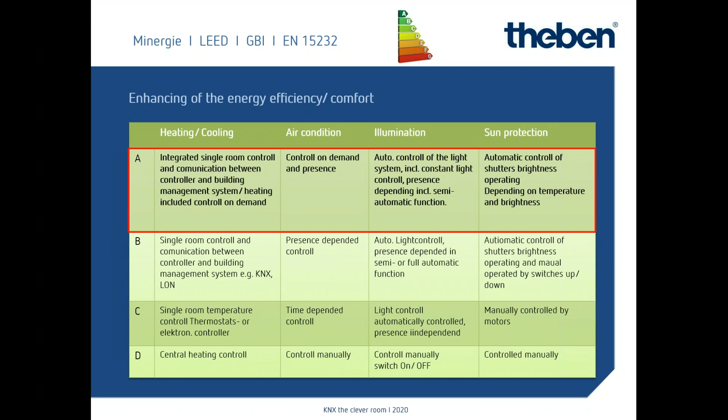And this content is nevertheless a part of GBI, a part of LEED, a part of EN 15232 and further on. The approach, when it comes to the shading control: sun tracking is the best, highest efficiency. Advantages finally: comfort, energy efficiency, and some of the shading controls, especially the actuators, are smart enough to support heating or cooling. We have here pretty few settings in our application to give you this reasonable support, this high energy efficiency. This just acts on presence, for instance.

So when the sun rises, you can see here. The sun rises early morning, so the sun is coming in quite flat. So we have here the blinds totally closed to avoid dazzling inside, for instance. Then the sun is rising more and more, comes higher in elevation, so then the slats open with the sun.

So what is the purpose of it? The purpose is that you get as soon and as much daylight inside the room as possible. Why? Because inside the room, you have to illuminate the room, isn't it? And the more daylight you get, the less artificial light you need. So the slats turn according to the sun positioning, which is called sun tracking.

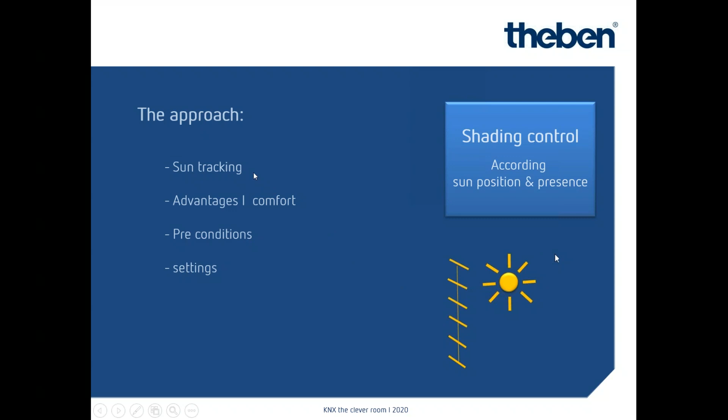So then it comes to the illumination. Illumination means constant light control. If you have ever had the chance to work under conditions of constant light control, you will love it, because it is the most comfortable illumination you can get. Early morning, midday, or in the afternoon, any time, you have the same brightness on your working spaces. And this is for your eyes, for your concentration on your work, most comfortable. And in regard to energy efficiency, the highest degree of it.

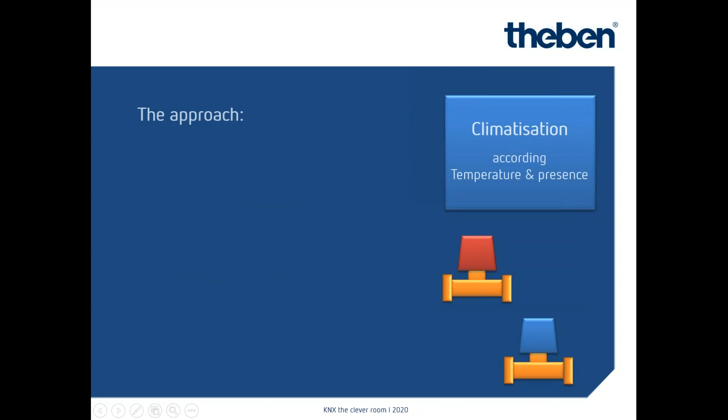Anytime you can modify the current brightness. So if you need a little bit more light, anytime you can override by manual operation, by push button or whatever.

And in terms of energy efficiency, in terms of climatization, here I'm talking today about the fan coil actuator. Because in most public buildings, school buildings, industry areas, offices, we talk in general about fan coil. That means heating and cooling. So for the different seasons, you have the right heating or cooling source in order to get the right temperature in your buildings, in your offices.

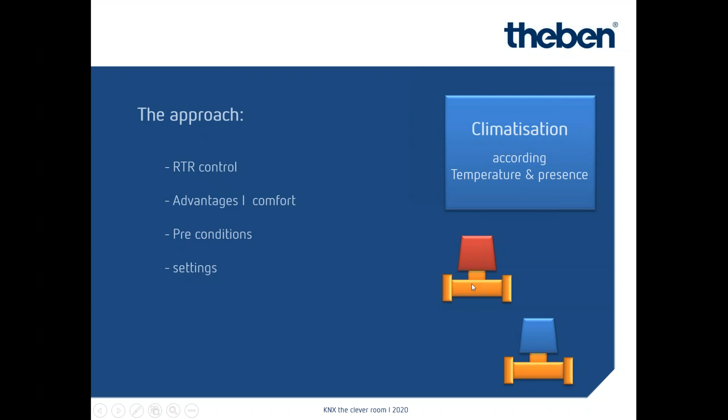For this purpose, you need an RTR, a room temperature controller. It could be, for instance, our iON, which is one of the newest products joining our product range. And what's the advantage of these fan coil actuators? The fan coil actuators give you both values, for the heating control and for the cooling control. We need just a set point, a set temperature from the room.

Air quality is important meanwhile, especially in public buildings, and not just in terms of carbon dioxide level. Like I mentioned, the better the air quality in the room, the more concentrated you are, the more comfortable you feel. Currently, dehumidifying plays a big role as well for well-being. So the degree of CO2 and the degree of humidity inside the room is essential for your feeling, for your well-being. And this you can control with a fan coil actuator.

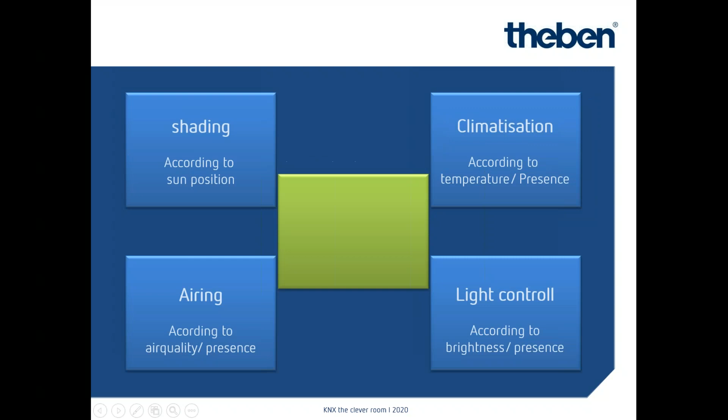And what if you put all this together in one room? That means you integrate, you collaborate all these functions, and the result could end up in the smart room or the clever room. So a little bit more detailed now. We just concentrate a little bit on the part of the heating. We need a room temperature control, sure. In our case, we take the iON, the room controller, then a heating actuator or a fan coil actuator in order to drive a valve. So this is standard.

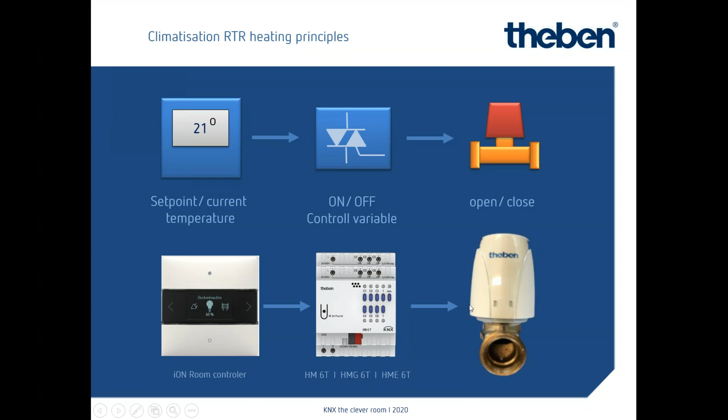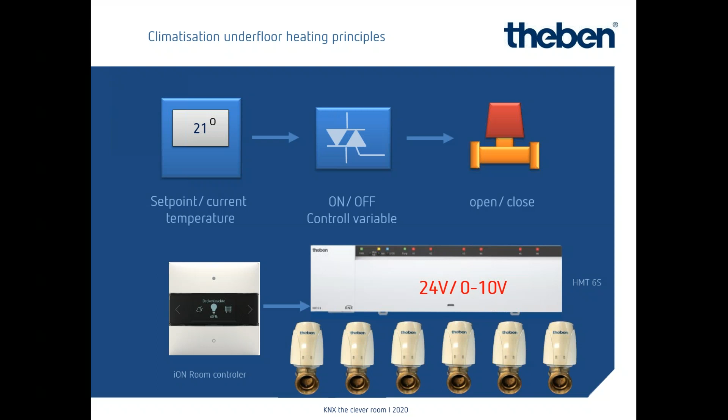But for this purpose, you have to use heating, or have to support heating and a separate cooling actuator to open the separate, let's say, valve. Due to that, we recommend to use the fan coil actuator. So this is just another example, the heating actuator for the floor heating, but you need a separate one. And if you want to do all in one, then please take the fan coil actuator.

And the fan coil actuator is able to give you three options to moderate the heating, and as well to do the airing control in 3 steps, or stepless, 0 to 10 volt output commands. For instance, to control dampers in big airing systems or climatization systems. So this could be quite interesting, especially the stepless 0 to 10 volt control.

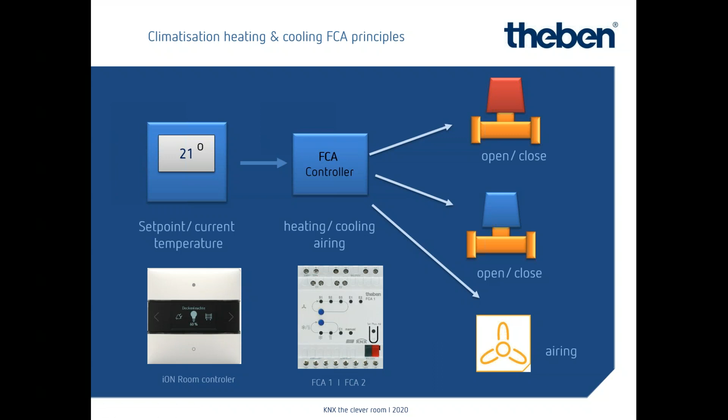So this means assisted by a clever shading control, which requires for the sun tracking the weather station, which in our case is Meteodata 140S, smart enough to know when the sun sets, when the sun rises, due to the local geo positions. And then you can address from the weather station which facade of the building shall start with the shading, which position we should have on the easterly side, which position of the shades we should have later on the southerly side and further on.

And the weather station is smart enough to give you the reasonable values of the repositioning when the elevation of the sun changes during the day. The higher the sun comes, the more open the slats get. In our example today, we are using the JU1, the small, tiny little shutters blinds actuator for this demonstration.

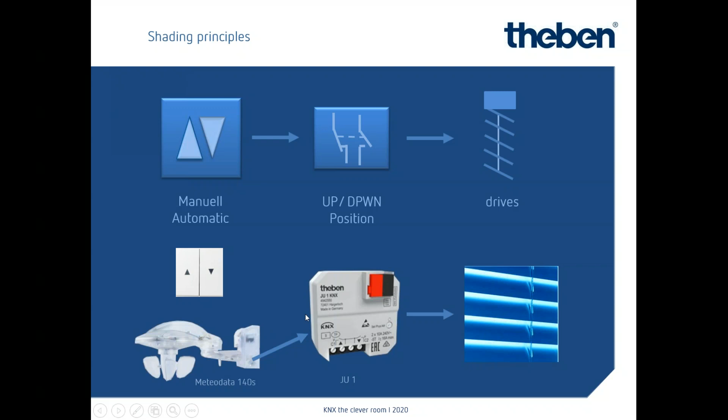And as well, we need the daylight control. So in the daylight control, which products are essentially required? You need a powerful presence sensor. And what is the precondition for the presence sensor? The presence sensor has to have a permanent light metering. So every second, the brightness sensor inside of the presence sensor should update itself.

How is the condition here on the table, for instance? If we have some clouds, the condition here on the table changes, and the sensor on the ceiling has to recognize it and send the dimming control commands accordingly, to dim a bit up, to dim a bit down. So this is an automatism you have to care about. If you do the setup once, you need exactly 4 group addresses, and then the system runs.

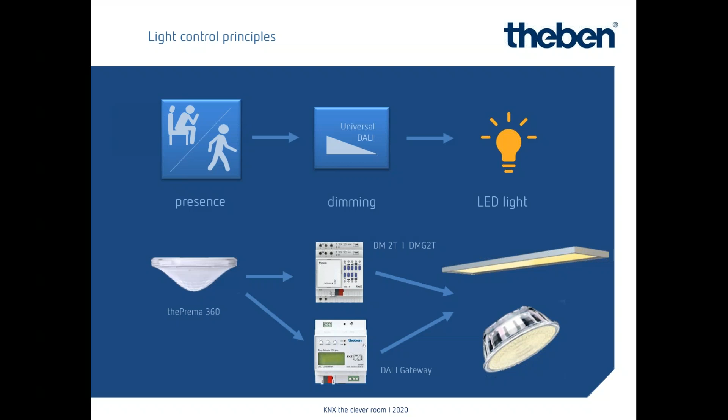Nevertheless, if we talk about the universal dimmer, as an example the DM2T, or if you do this light control with a DALI gateway, you have implemented, in this case, for instance, 64 lights. You do some groupings of different lights for several areas, and then you can do the constant light control accordingly. Fully automated, so that means you don't have to do anything.

But as well, you can anytime press a push button and override if more light is required, or probably for school purposes, the teacher or the professor wants to show some video, and so you have to reduce the indoor light. So at any time, you have the chance to reduce or to manipulate it however you like or need it.

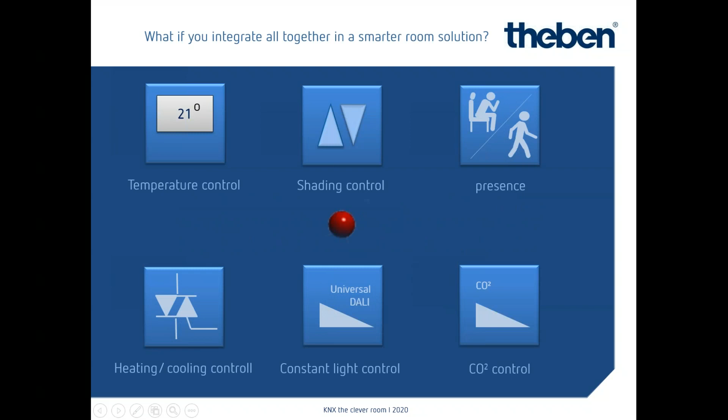So what if you merge all these together? This makes the smart and the clever room. And this sounds really complicated. First of all, it's really sophisticated to do the temperature control, the shading control, the presence, and so on. But what you get, what is the reason why we put all these together? Let's share some ideas with you.

So if we want to have heating support due to shading control, according to the brightness threshold, the blinds remain open. Why this? Let's do an example. The indoor temperature early morning is probably 18 degrees, so not that much.

So nobody is in the room, but the sun was rising, and we have now a pretty warm and pretty good summer day. And the threshold is met, the condition is met. So then in general, the blinds run down and close to give you reasonable, let's say, sun protection. This is standard.

So, but what is the intention? What is the idea of this solution? Nobody is present in the room. The indoor temperature is below the set temperature. Outdoors, we have nice sunshine, a nice day. So what happens? The sun will give you energy, warmth energy for free through the windows. It supports us to heat up the room, doesn't it?

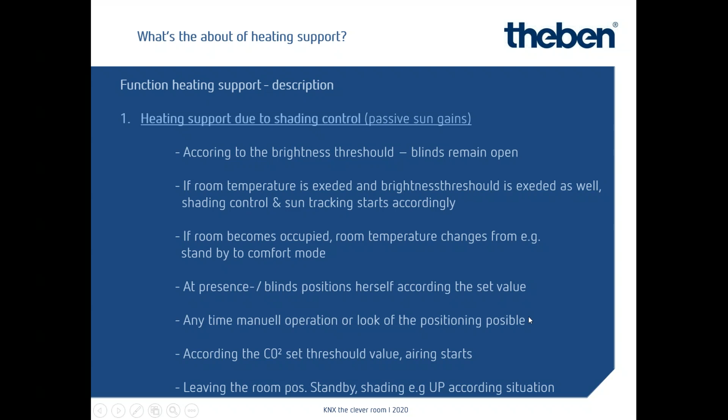And what if we talk about the cooling support? We have a lot of sun, we have warm days like we had here in the last couple of days in Germany, 35, 36 plus. Amazingly warm. So what we need here is cooling support. Basically, such rooms are climatized rooms, supported by a huge cooling system, for instance.

So what if early morning the sun is shining brightly? The blinds automatically run down. The start of this procedure could be given either by a bit command, by a push button, so you can start it manually, or you have time management in the background, which gives the on command, so operate now, enable now this sun shading control.

So early morning, the sun is shining brightly. Nobody's in the room, but the blinds run down immediately. Fully closed, which means full protection from the infrared light of the sun. If somebody pops in for the lesson, for a meeting, whatever, then just the slats open to the position calculated from the weather station, according to the elevation of the sun. So you now get a maximum of natural daylight inside the room.

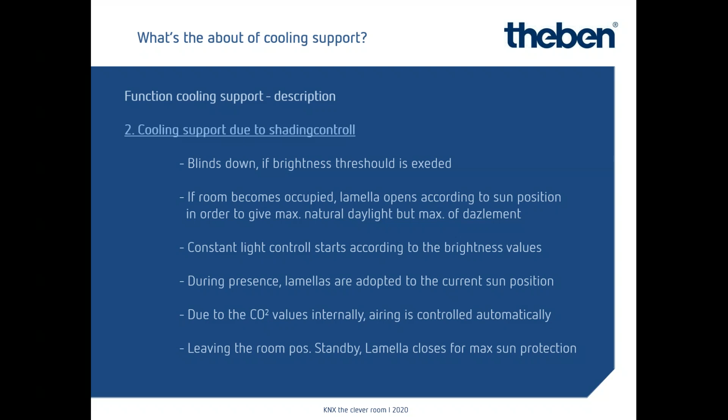And when people or students are finally leaving the room, the presence sensor discovers, okay, nobody is there anymore, the lamellas close 100% and give you shading protection again. So the cooling system gets support from the blinds automatically. You don't have to do anything. This is an automatism which runs on its own. I think it's really impressive and pretty simple.

And again, you probably expect that it's rather complicated to do the setup, the allocations, the group addressing, and so on. I will allow you a glance behind the curtain. So you see here, this is an RTR, room temperature controller, could be Varia, could be our iON. You just need to give the heating value to the heating valve or to the FCA. However, you need this as well for the cooling support. So this is just one group address from object 13 to object 0 of the FCA2, and object 16 of the Varia to the cooling object of the FCA2.

Then you need, for instance, the activating value, which you have to send to the shading control, because in our smart blinds actuator we have a communication object which requires the situation in the room. According to this situation, the smart blinds actuator determines if it has to support us with cooling, which means down and closed, or if the room condition is not met, it releases the shading to the upper position in order to support us with maximal daylight and with the sun, which helps heat up the room accordingly.

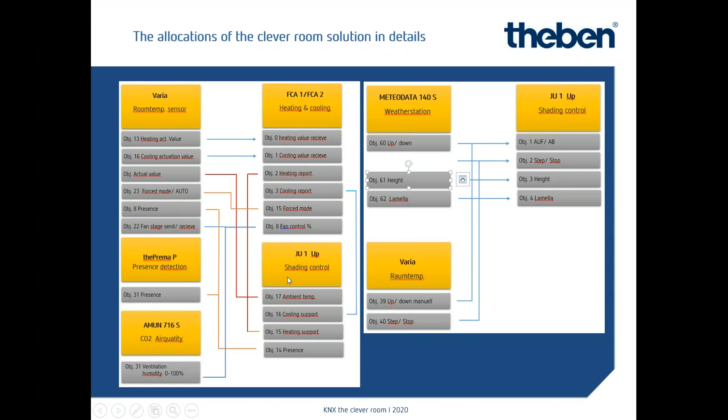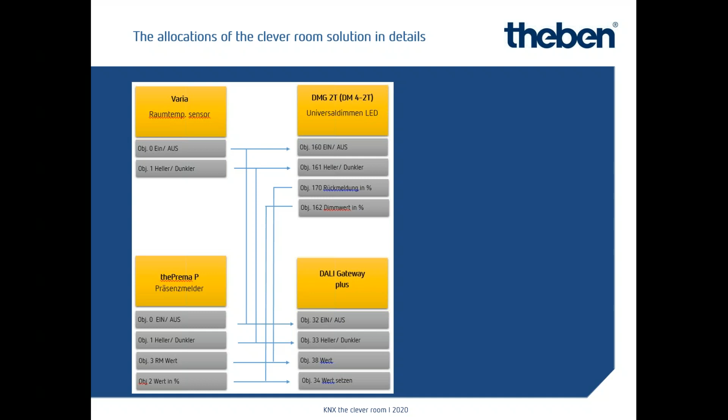So I am currently at, let's assume, 62%, and the system compares it finally to the reasonable situation on the table and decides, okay, it has to send a value again because the condition is not met, so please rise further on. And when the condition is met, the system sends a stop telegram, and the constant light control stops immediately. If it's the other way around, it becomes darker - because it's a cloudy day, thunder is upcoming - then the presence sensor starts again to send on communication object 3 a value telling the dimmer: please rise your dimming value a little bit because I have to bring this all again into harmony, because some artificial light is required.

So pretty simple, and only a few group addresses are required for such a sophisticated solution - in terms of energy efficiency, the highest degree in a room.

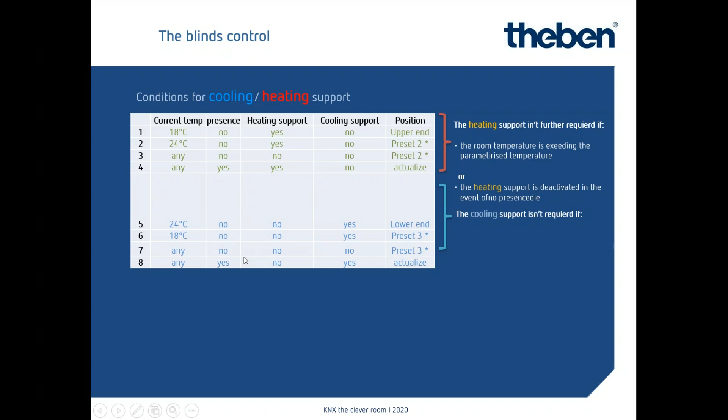If it comes to cooling, 24 degrees is the internal temperature, nobody there, heating support is not required, but cooling support, yes. So then drive down, lower end, close the blinds totally. Depending on that, you have a fully automated system.

The effect, to make it a little bit more precise - this is sun tracking. Here is an example of a single family home. We have here a 4-channel switching actuator. The sun is rising on that side, so this sophisticated solution, this sun tracking, starts on the easterly side.

The flaps, the slats, are adjusting accordingly. Then the sun is moving around the building - this is the azimuth - so it runs around or moves around the building. Then channel 2 starts here to give you the reasonable shading when the sun comes at late noontime. So it starts here, and finally it ends up with channel 4 on the westerly side, where the sun finally sets.

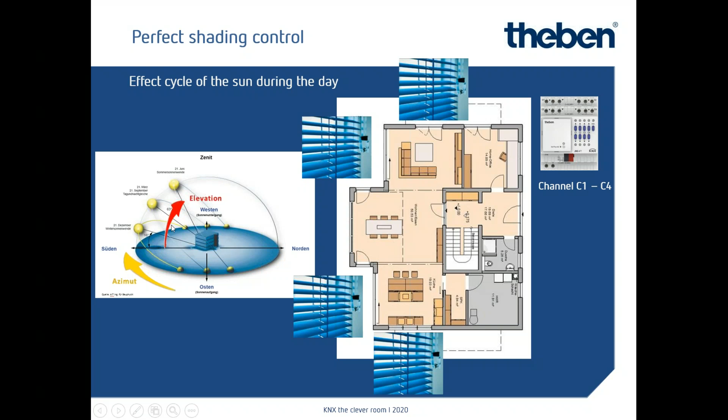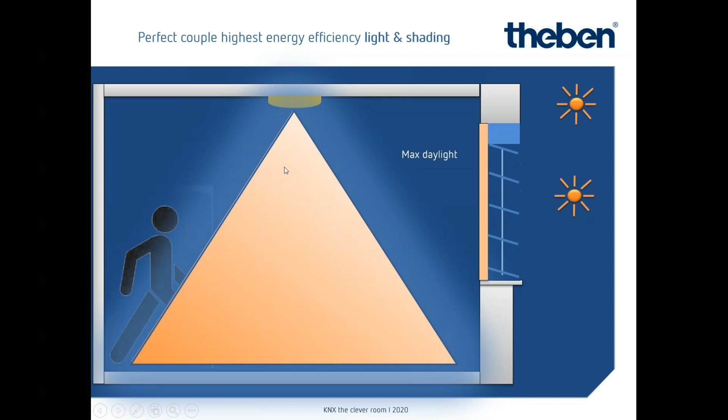Depending on this elevation, on the positioning during the year, the slats are opening and following exactly this move of the sun day by day. That's the approach: you come in, the artificial light turns on, and as the sun rises a little bit, the slats move accordingly, so you have the maximum of natural daylight, and you can start to dim down this automatism.

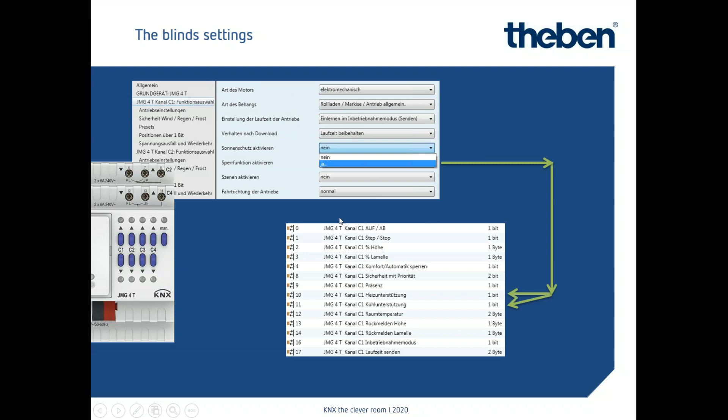And this is, I think, quite interesting. So in regards of the application settings, let's take, for instance, the application settings of a shutters and blinds actuator. We need, for instance, the kind of motor, for instance an electromechanical motor, and this has to be linked finally to heating and cooling support.

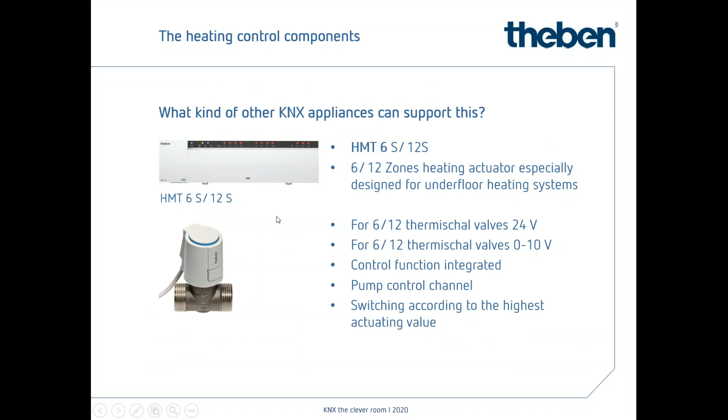Similar settings exist for maximum energy efficiency. You can use, for instance, the highest actuating value. This could come, for instance, from floor heating, or it could come from ventilation.

And if you have a smart heating solution which is, for instance, communicating on an OpenTherm base, then you can act on the heating curve. If there is a big demand, automatically you can raise the heating curve. If there is no demand for heating, you can lower the heating curve automatically. This you can execute finally by the OpenTherm gateway, the heating gateway from our product.

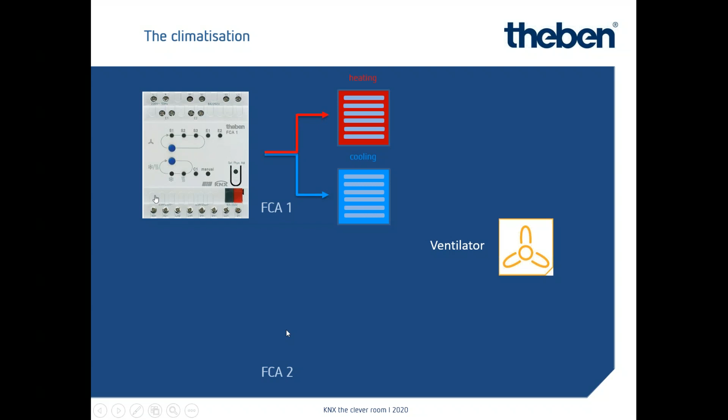I have not considered this in this presentation, but this could be an additional plus, for instance, to achieve the highest degree of energy efficiency. FCA1: heating cooling support plus ventilation, step 1, step 2, and 3.

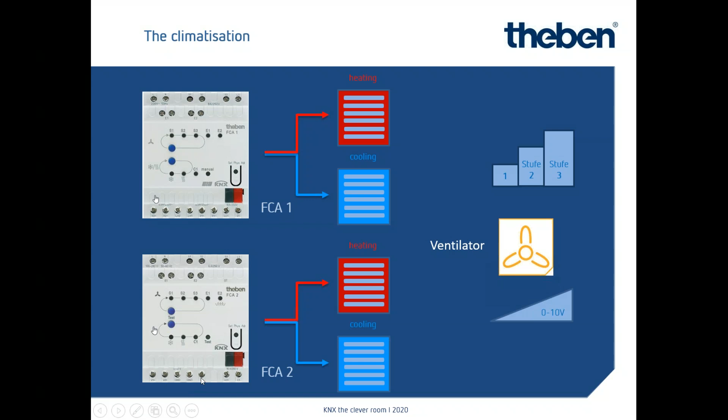And here we have the FCA2, looks totally similar, same housing, the difference is in the printing, FCA1, FCA2. The most important thing is finally the output, which gives you a 0 to 10 volt control command in order to provide stepless control.

Short step into the CO2 control. I think this is something we should consider more and more, for instance in school rooms. We have to bring in a good value and amount of fresh air, because 30 children during the day need about roughly 750 cubic meters of fresh air during the entire day, depending on the size of the room and so on. These values I got from the Association of HVAC manufacturers.

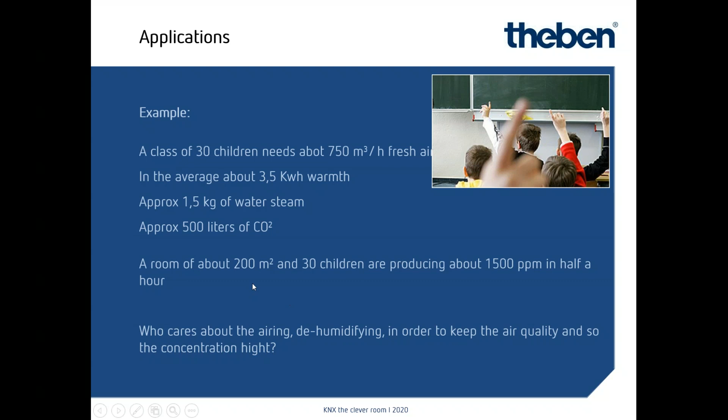The average heat that people give into the room from their body is approximately 3.5 kilowatts. Depending on humidity outside as well, approximately 1.5 kilos of steam humidity, and approximately 500 liters exhausted, 5 liters of CO2. So that means there is a big impact from a certain amount of people in a room, which finally requires a reasonable, good ventilation.

There are different approaches. When it comes to ventilation in general, you can do it according to, let's say, a time control, a time management system—every hour for 10 minutes, for instance, the ventilation runs. Okay, fine, everything is well, but what if nobody is there? Is there any need? The ventilation costs electrical energy.

And consider, for instance, when we have autumn or winter time, we have cold air outside. We need heat to heat up our rooms, our environment inside. That means warm air is exchanged, blown out to the ambience, and the fresh air which we bring in has to be heated up again.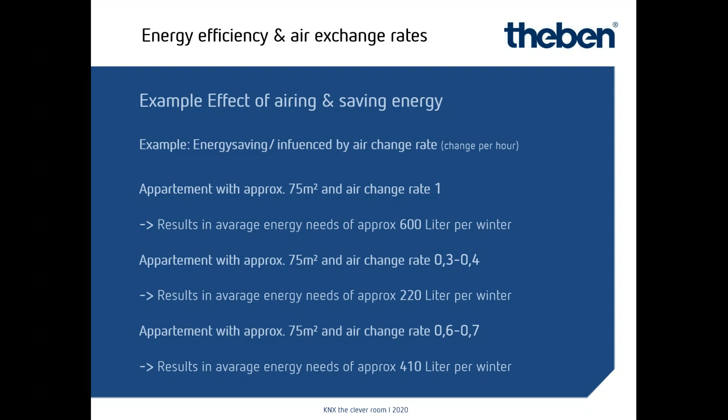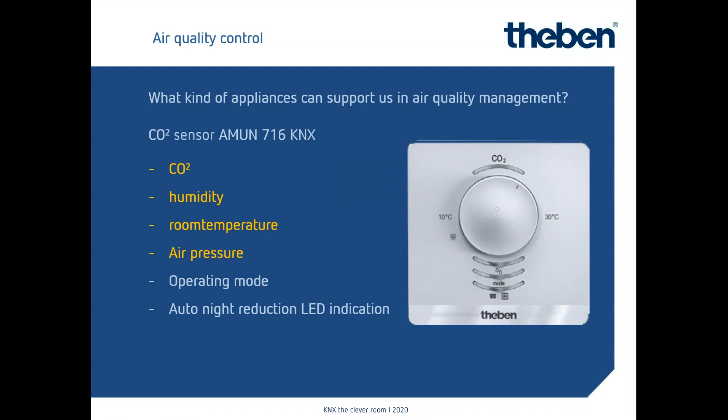Due to this presence-dependent CO2 values, or presence sensor, like the Amun here for instance, this acts as a kind of independent referee. The sensor discovers the air quality—nobody there, so the air quality has no reasonable changes, why should it? If people are coming in, a class or lesson starts, or at university the professor holds his lesson, a bunch of students come in, and automatically the CO2 value rises. The sensor discovers this and drives accordingly the air ventilation or dehumidifying. This is an automatism running on its own—there is nothing to do.

But I think one thing you need to know to get a little feeling about that: breathing in a good environmental circumstance, for instance when you go hiking or are just out in the environment, in general we have good air, and the air quality is approximately, depending on where we are, 400 to 600 ppm, parts per million. But due to natural human breathing, the exhale, depending on physical strain, can be up to 40,000 ppm.

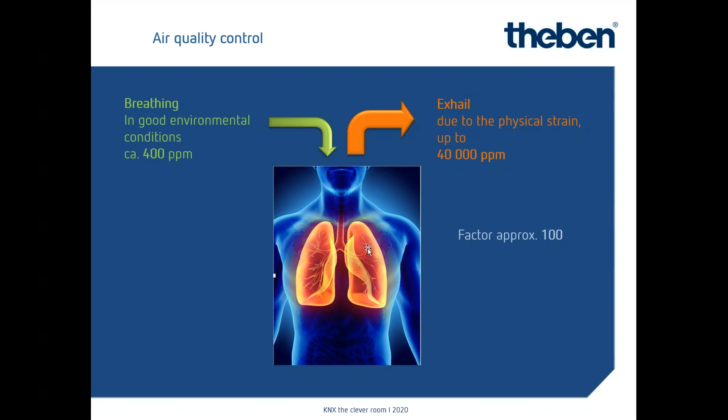Okay, any questions? So that means we have here a certain factor which has a certain impact on the air quality inside of the room. We are talking about CO2.

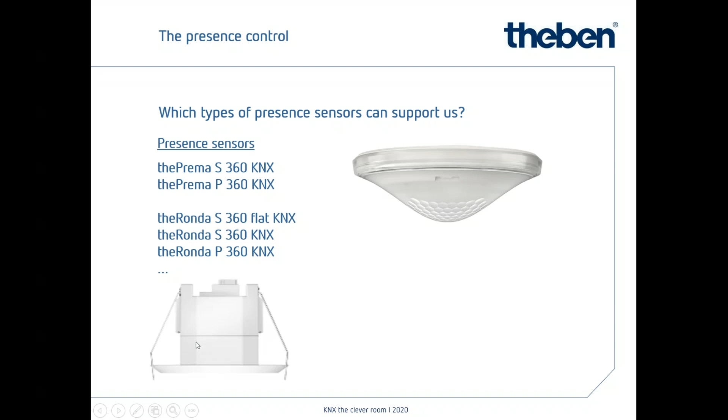So for a reasonable, good light control, we need the presence sensor. So thePrema, for instance, the Prema P is this one here, or the theRonda S flat, KNX based in this case. Ideally equipped with permanent light metering. The lux levels could be adjusted externally.

And finally, we have here short-term presence detection. So just as an example, when somebody is entering as a teacher, just entering in this classroom, nobody there, okay, go, done. Our sensors are smart enough to realize there was just a person there, just watching in.

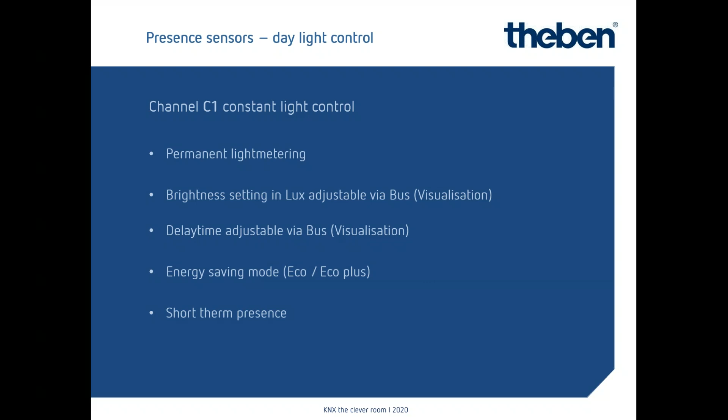So we take this time frame, and if the time frame is below 20 seconds, the set delay time, which is in general in the classroom 10 to 15 minutes, is automatically readjusted down to 2 minutes. Latest after 2 minutes, the automatic light control is switched off.

And this could be of interest as well, depending on if you equip a schoolroom or an industrial area, you can adjust the speed setting. That means the constant light control, how fast or how slow it should act.

I recommend keeping this in a middle or low speed quality, because if you are a little bit sensitive, probably affected by migraine, a fast constant light control is not recommended. So keep it in medium or slow speed.

But what is most important, if you have chosen these school settings, anytime you override, you can momentarily put the light to your desired value. For instance, the teacher wants to show a video, and artificial light is a little bit too bright. However, anytime you can override temporarily, this is one option.

And if you put these settings in our presence sensor into office position, so if you modify brighter or darker, this new value becomes the set value on which the constant light control is controlling. So if you want more light, you dim reasonably a little bit more up, and then it's the new threshold, and the constant light control works to achieve this new set threshold.

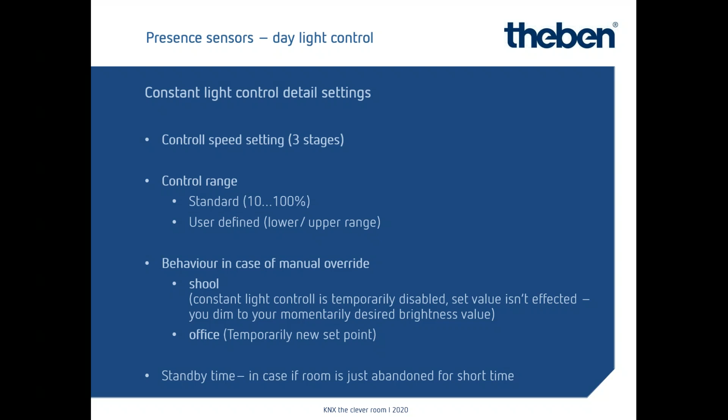When all the parties have left the room and the delay time has elapsed, in both cases, school or offices, it goes back to normal. That means the set values in the ETS settings are taken again when the next person enters, or when the next lesson starts.

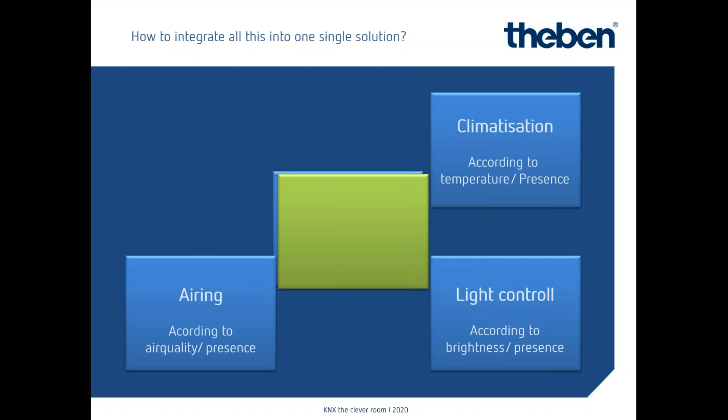So that means presence dependent control, smart and clever, energy efficiency, automatic and full automatic heating and cooling support, sun tracking at its best, maximum CO2 air quality, energy optimized, and fast and easy to configure. So that's the theory. We put all these ideas together in one room and one solution to finally get what we call the clever room.

We need, for instance, to set this, and I'll do it online now, I just have to do a cross check if I'm linked with the IP router. Give me just a second to be on the safe side. I have to link to... came back to this, company settings. Sorry for keeping you waiting for a second, but I have to change now the link to the Wi-Fi network to the router, which is built in here in my demo case. This takes a second, it's not me, it's just the system. Okay, here we are.

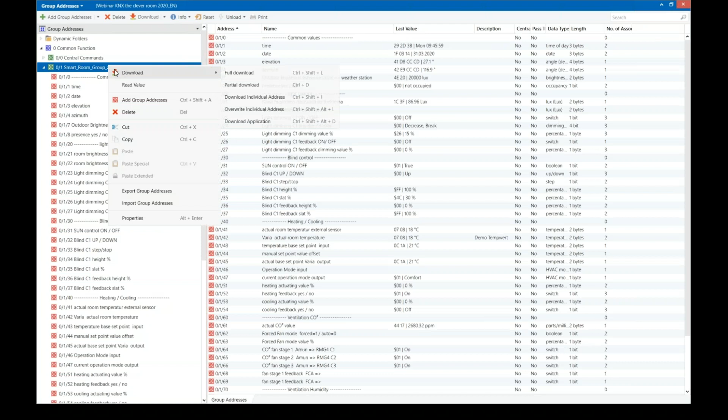So that's it. So coming back, move up here. Okay, it's a little bit slow here. So here we are. So we have here now time. Let's start a short example. So I write a value. Assuming, for instance, we start at 7 o'clock and 10 minutes. Okay, and write this. What's ongoing here? Again, write the value.

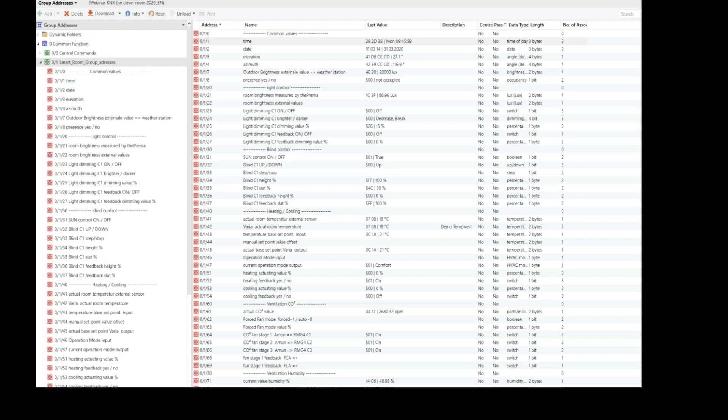I see. I will probably do the commissioning. Give me just a second. It switches always back to the page which I don't want to have. And I discover now a pretty slow communication in my system. Currently I have just a white sheet of paper. So I try to switch to the other page. Currently the ETS gets stuck. I just get a white sheet of paper now.

Bitte? Yeah, yeah, but I cannot see. There is something in the background now. I'm really sorry for that. What happens now? No. White screen, don't know why. Yeah, habe ich, komme dran.

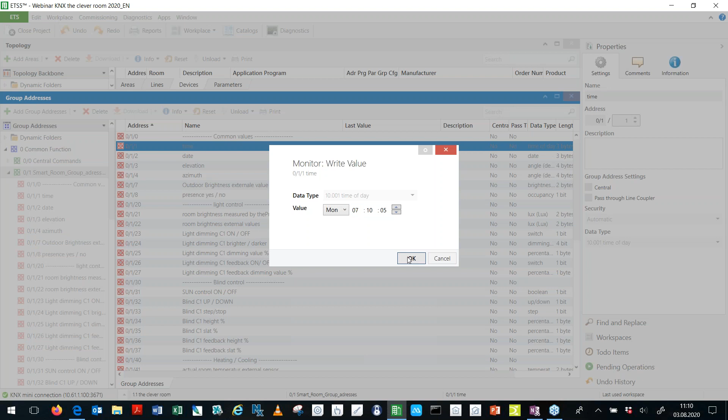So then I open the workspace and the group addresses, full screen. We have now again our pages which we need. So let's see, smart room. Hopefully I can have this now. 3, 2, 1. Okay, again try to write the value. So I'm now at 07. Send date and write value. Assuming, for instance, we are talking about March. It's okay.

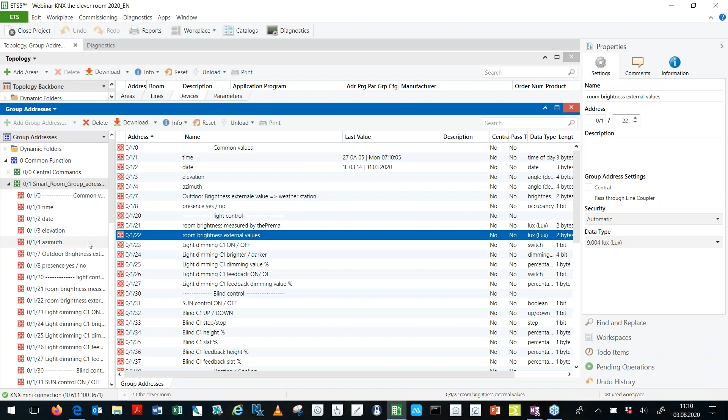So then we need to send the base setpoint temperature. External brightness: we need the room brightness external value, the outer brightness, this one here. And assuming we have, for instance, 20,000 lux, nothing happened again. So you see here on the presentation, Christoph, you can start the camera link. Presence currently is not existing.

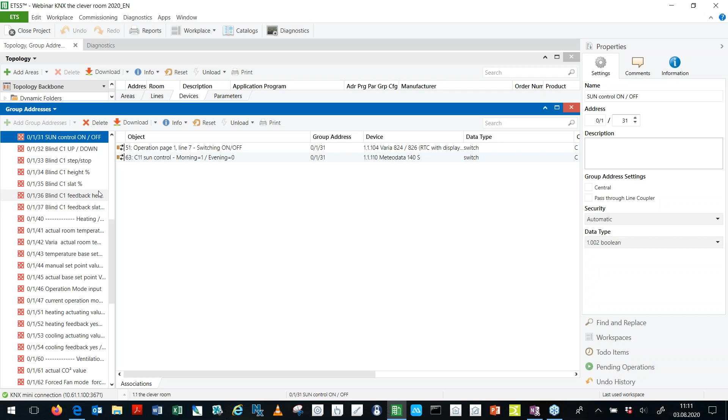We need the sun control to activate. Sun control activating here. I write the value, for instance, true. So this is fine so far. And we need the actual room temperature, and this we need to write as well. So the current room temperature is, for instance, 18 degrees.

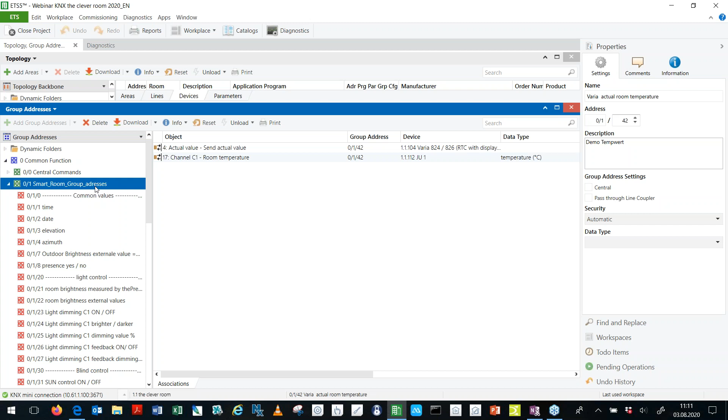And send. So what happens currently? Nothing, because it is early morning. We have 20,000 lux. To get a better overview: we see here it is 7:10, the 1st of March. 20,000 lux is external brightness, sun control is activated, and the current room temperature is 18 degrees. So nothing happens. That means the blinds remain open, as you can see here.

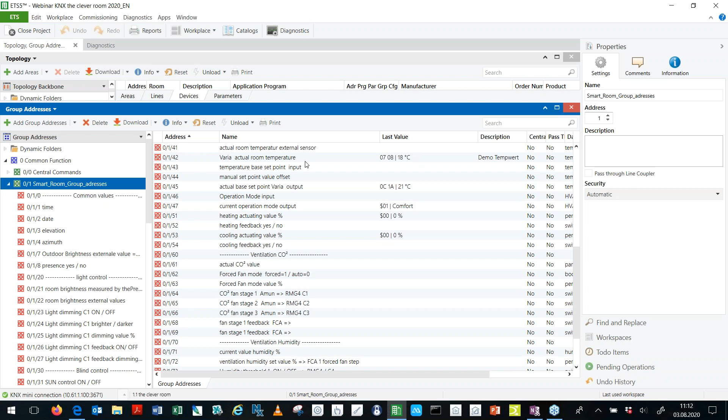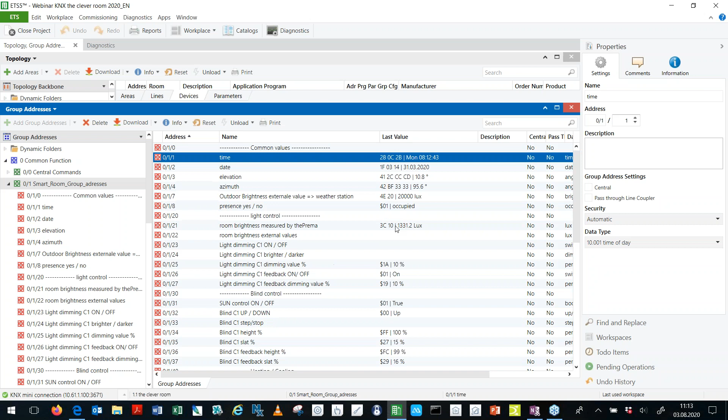So now probably the class is occupied, okay? That means we have no need to do any kind of shading because the sun is so flat. And what I'm doing now is giving here the right value, and I write, for instance, 808. And what you see now, the blind in this case is moving down, and we concentrate here on this value. So the current value is finally in this stage. Slats are at about 15%, yes.

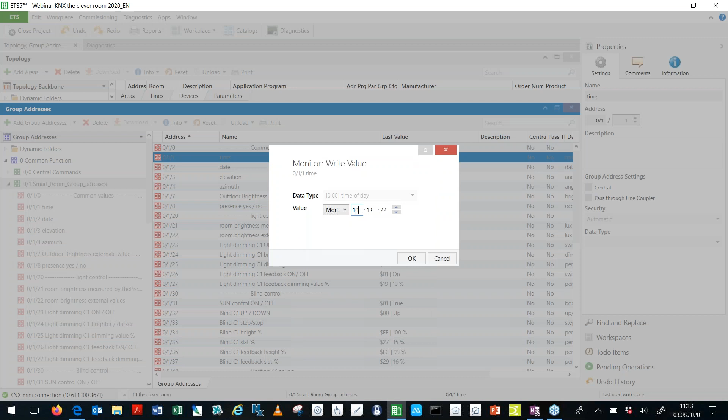And now I modify the time, write the value to, for instance, 10 o'clock. And you see the correction of the slats is done. The slats have opened a bit more, and further on I download another time, and now you see the slats are in a horizontal position. The light condition is currently not met because it's too bright in our studio, and probably I can manipulate a little bit to give the sensor the feeling it is dark enough, so the constant light control has to start accordingly.

What you discover here: the constant light starts, and the heating and cooling control is currently ongoing. And if nobody is in the room anymore, after a short while the presence should turn to not occupied, and then the blinds shall open again. It takes a while, and then the blinds are moving up again to their upper position. Depends on how it is finally controlled.

If I give here, for instance, a little bit of humidity, then it takes a few seconds, and you see now it turns to another color, and the stages in the actuator are meanwhile stage two to dehumidify. That means we now have the maximum of dehumidifying, so we have a good air control for that purpose in the room. The blinds are up meanwhile, and the condition is met.

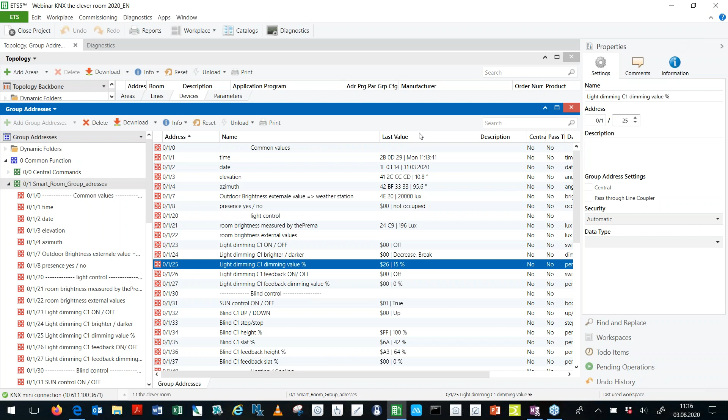So finally, this is the webinar's end for today. Hopefully I could give you some reasonably good impacts and inputs. I have to say sorry for the short trouble with the ETS. But at the end, you could see the system works, and the way to do the group addressing and the setup is really, really simple. It's not really specific.